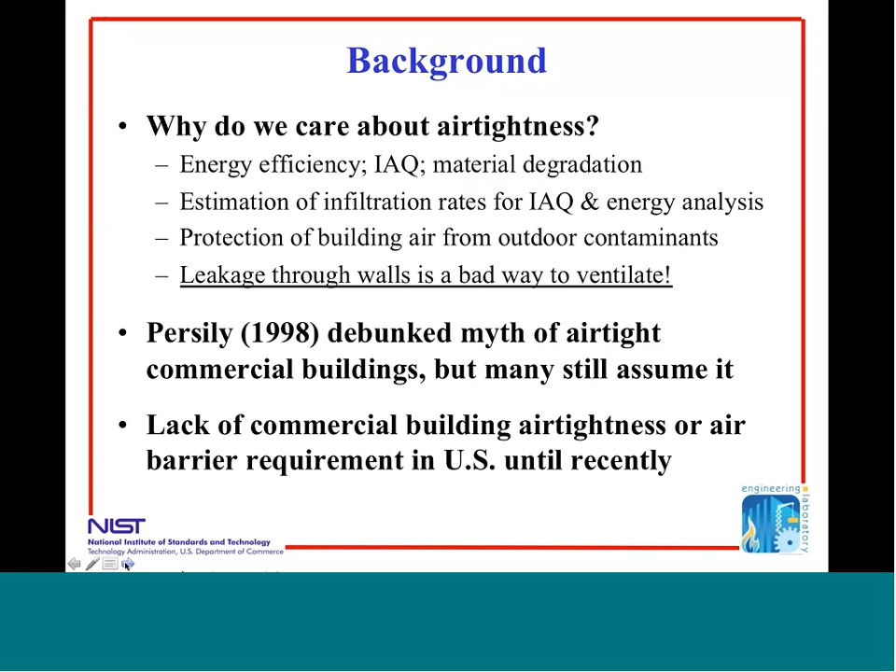Until very recently in the U.S., there were no commercial building airtightness requirements, no testing requirements, no air barrier requirements, no requirements for specifying anything in particular in the design that would make the building tight. Nobody designed the building to be leaky, but in reality, unless you design it to be tight and take some care, there's a good chance it's going to be leaky.

So some of the historical data that we collected over the years shows, for 228 commercial buildings in the U.S., the mean airtightness in units of meters cubed per hour per meter squared of envelope area at 75 pascals, which immediately brings up an issue that's been raised earlier about what's the metric to use. We're all able to convert between different metrics, but it can be an unnecessary pain in the neck, I think is the term, to do that conversion every time.

And just for reference, I listed some equivalent leakiness values for some homes. If you take a home of a typical U.S. home size and convert the air changes an hour at 50 pascals to these units of meters cubed per hour per meter squared at 75, you can see on a per square meter basis, the U.S. commercial buildings were just as leaky as a U.S. home, which is quite leaky.

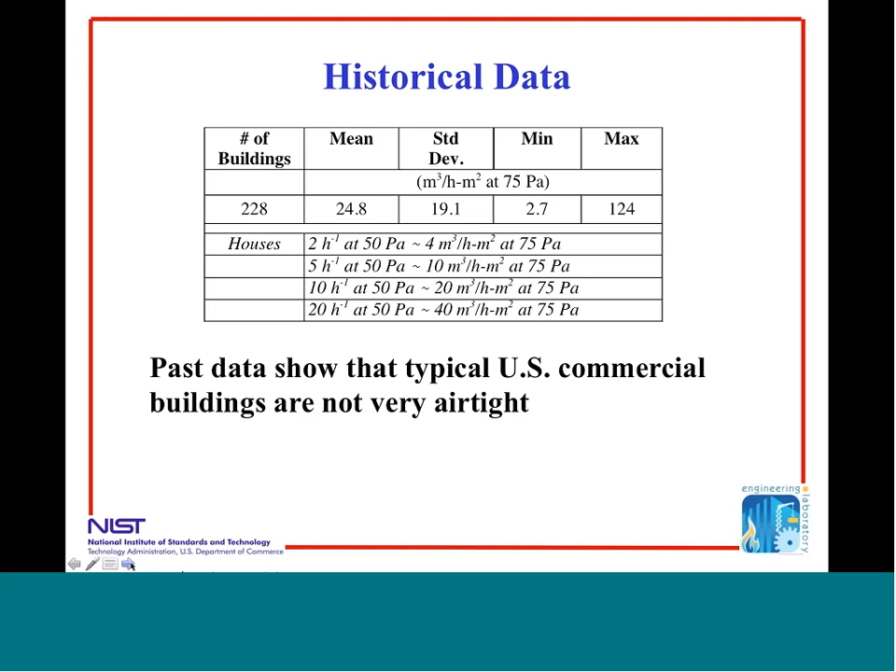But one common belief, not based on fact, was that newer buildings were tighter in the U.S. So we plotted the airtightness data we collected versus year of construction, and saw no trend at all.

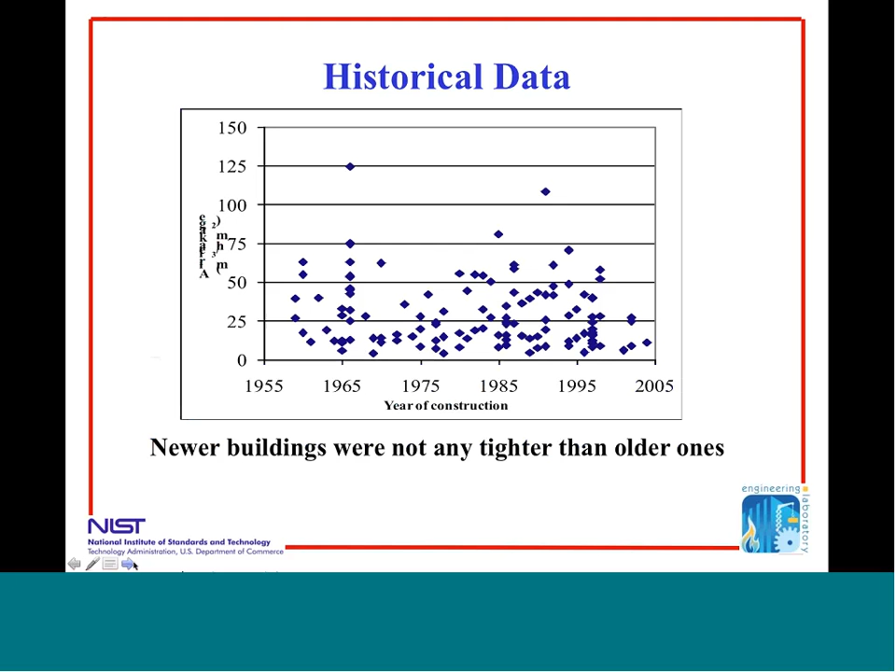Some old buildings are tight, some old buildings are leaky, and that trend has continued. But there was no data, up until the early part of this century, to support any conclusion about new buildings being tighter. Now, they could be tighter, but there's no data to support that conclusion.

We also looked at the energy impacts of commercial building leakage. I won't go into this in detail, but we looked at 3 types of buildings: retail, office, and apartment. And we looked at 5 climates. For those of you not too familiar with the U.S. climates, the 2 on the left, Bismarck and Minneapolis, have some very harsh winters. St. Louis has hot summers and cold winters, and then both Phoenix and Miami are warmer climates.

And we showed through this analysis, looking at typical airtightness and improved airtightness, that the energy savings for heating and cooling were potentially quite significant. We always believed this, but the analysis supported our preconceived notions.

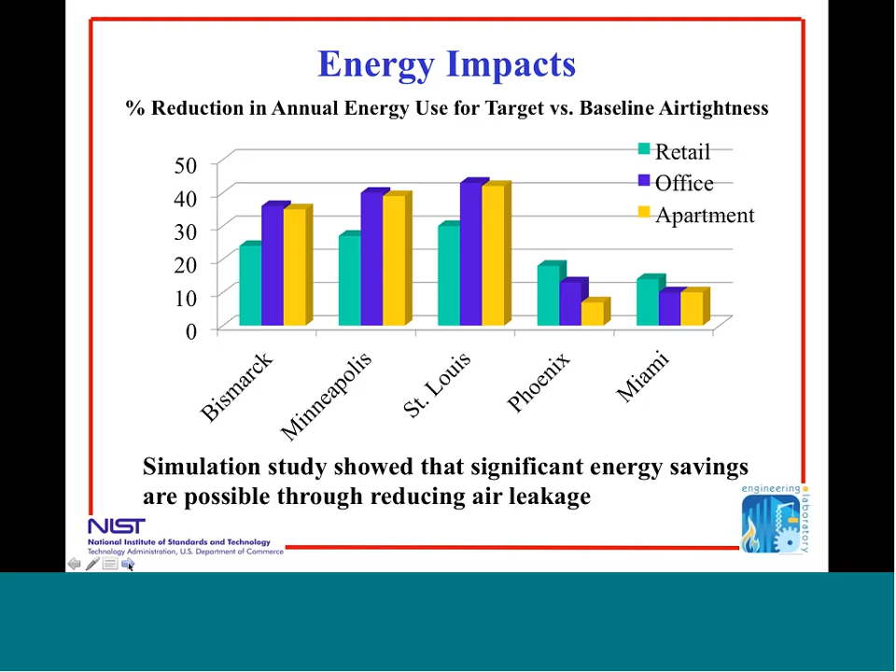So more recently, some organizations, such as ASHRAE, some federal agencies, and some state governments have started to add airtightness regulations. Either it's a material requirement, meaning you have to have an air barrier in the design with the material with a certain level of tightness as listed here. And here we see liters per second per meter squared. So I just wanted to show you that I also could use different units and make things confusing. But if you multiply this by 3.6, you'll get the other units in the earlier plots.

So some requirements are in terms of the air barrier material. Some requirements are in terms of the assembly, taking that material and putting it together with its various components, which tend to be leakier than the material itself. And then finally, there are some whole building testing requirements. So ASHRAE Standard 90.1, which is the energy efficiency standard, has an air barrier requirement, which was added within the last couple of years.

ASHRAE 189.1, which is the high-performance green building standard, has a whole building testing requirement, testing value as well, but it is not required. It's an option. And then IECC and IGCC are 2 different building codes. The U.S. Army Corps of Engineers is a government agency that builds a lot of buildings for the military. They have added a whole building testing requirement for all their buildings, which is really a big step forward and has had quite an impact.

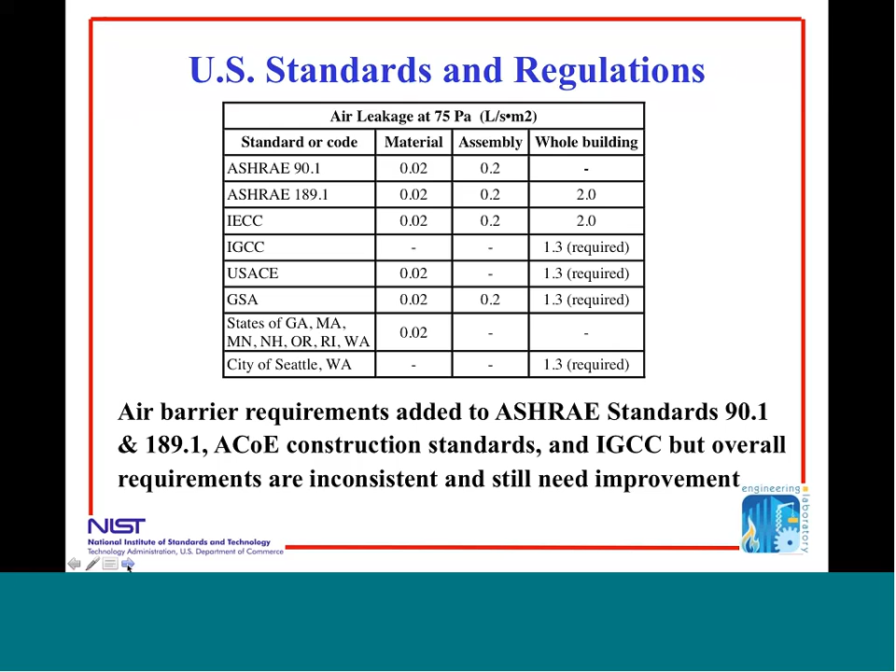GSA, the General Services Administration, is a government agency that has a requirement, but I don't know how well it's enforced. A number of states have some requirements, and 1 city is listed here. So we're starting to see in the U.S. some actual airtightness requirements in commercial buildings, finally, but they are inconsistent, and there's room for improvement both in their consistency and their enforcement and their implementation.

This plot shows in the red dots the historical database of commercial building leakage that we've assembled. And the blue dots in the lower left of the plot are the more recent test data from the Army Corps of Engineers, which shows how much tighter they are. They're all, in the units displayed here, about 5 meters cubed per meter squared per hour or less, while of the other buildings, a small fraction are that tight, and many of them are much, much leakier.

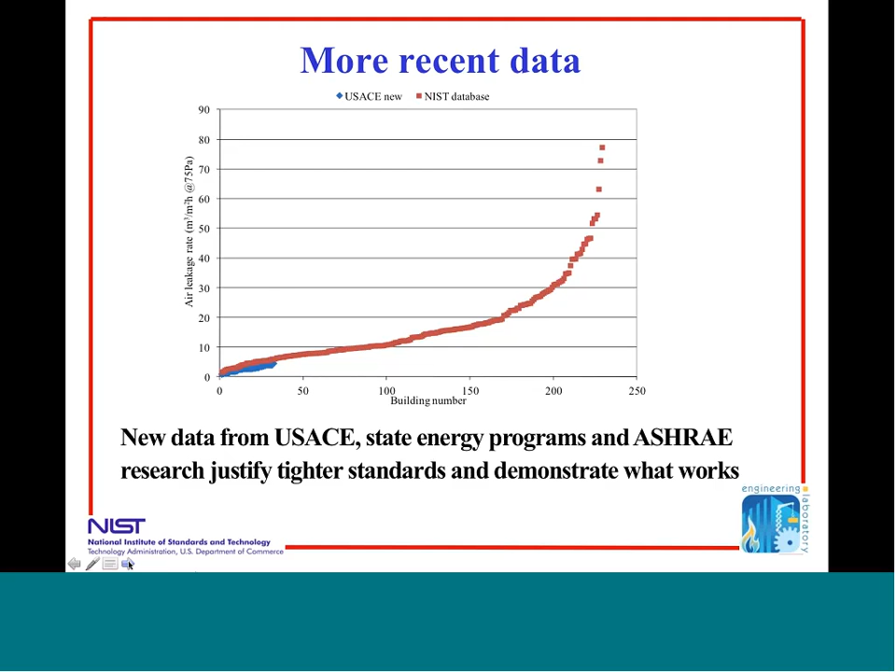So there's this new data coming out of these various programs, which is justifying these tighter standards and demonstrating what works. And there's a lot to be learned from these, and I think we'll hopefully be doing even better in the future. A couple of thoughts on what we're up to with this database and the related issues. We are acquiring more data on the tighter buildings, so we're going to be able to, through this database, really show the beneficial impacts of these programs and hopefully get a better sense of what works and what doesn't.

The ASHRAE standard I mentioned earlier, 189, is considering a proposal to require whole building airtightness testing. This is the high performance green building standard, and that proposal will go out for public review very shortly. And Standard 90 is considering a new approach to considering tightness under their performance path.

And finally, these are all new building standards and new building programs, but there are a lot of existing commercial buildings that are quite leaky and a need to deal with the retrofit. It can be hard to retrofit residential buildings, and it can be much harder to retrofit a commercial building. And hopefully some approaches and technologies and ideas can be generated to deal with the large number of existing buildings which are quite leaky. So that's the end of my presentation.